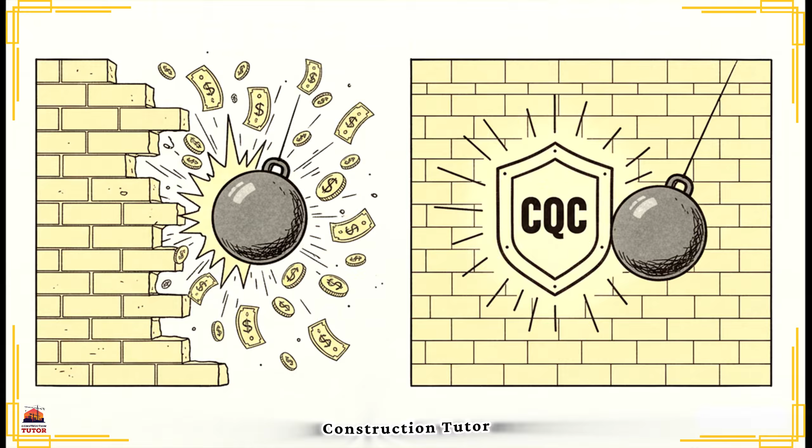Today, we're jumping into a really critical topic for any contractor out there, Contractor Quality Control, or CQC for short. So let me ask you, what's the one thing that can just absolutely wreck your budget, your schedule, your everything? It's rework, right? Having to rip out work that's already done because it wasn't right the first time. It is a massive and totally unnecessary drain. But what if there was a system specifically designed to stop that from happening in the first place? Well, that's exactly what CQC is all about.

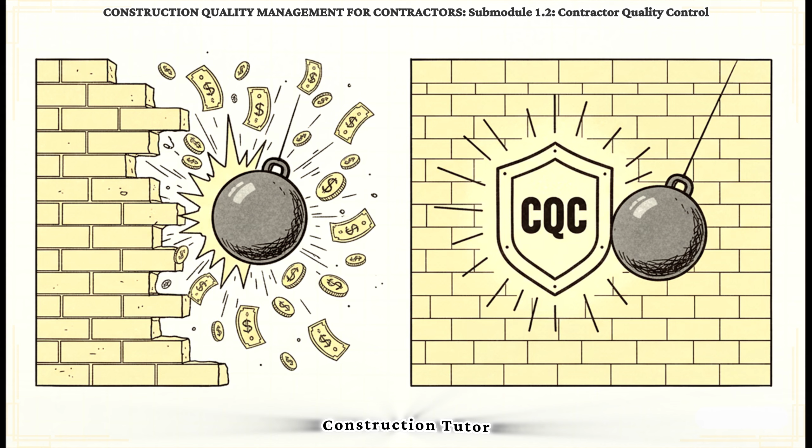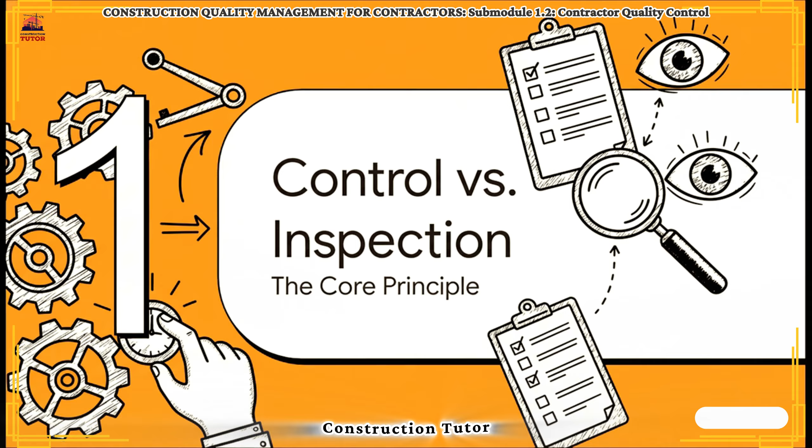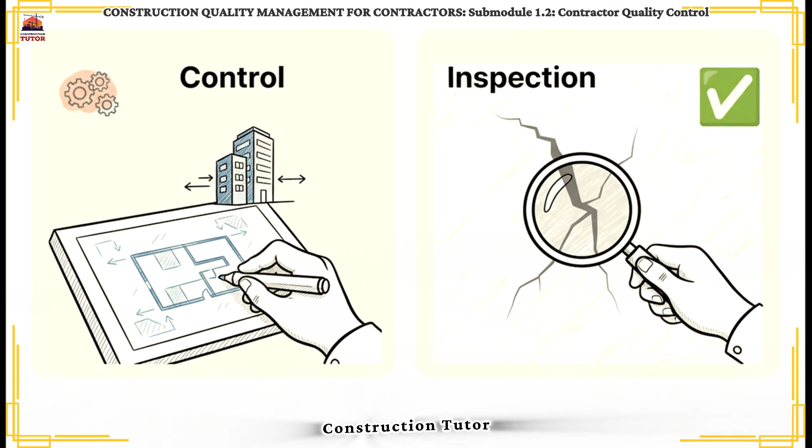Now, inspection, that's looking backwards. It's checking work that's already done or is in progress to see if it meets the spec. It's an after-the-fact process. If there is just one thing you take away from this whole explainer, let it be this. Control is preventive. Inspection is after the fact. A really solid CQC program is built entirely around that idea of prevention. It's a total mindset shift.

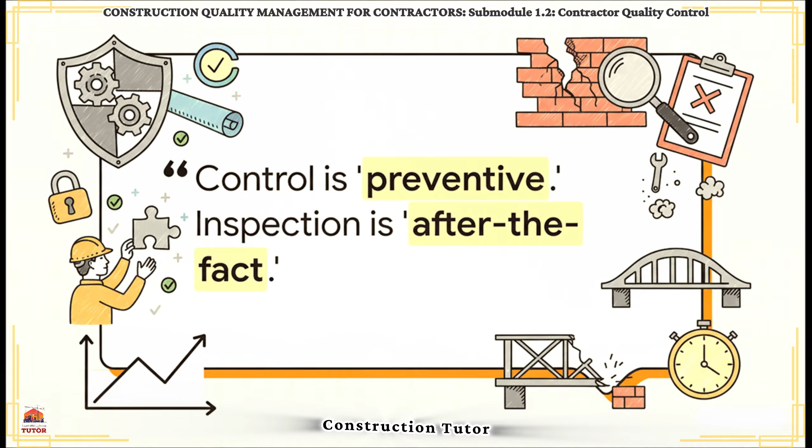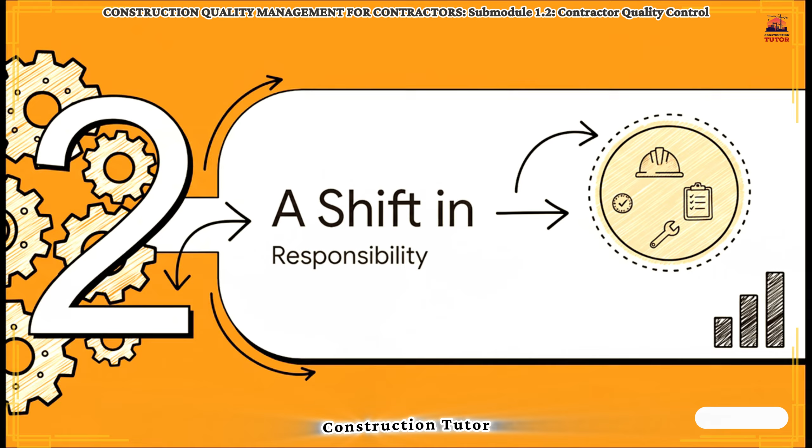Okay, so knowing that key difference, how has the construction industry actually put this into practice? Well, there's been a pretty huge shift over the years in who's actually responsible for quality. Back in the day, it was a completely different world. The owner, the government agency, they were the ones basically running the quality show. They were on site, telling the contractor what was good, what wasn't, what to fix. And honestly, it put a huge strain on the agency, and it really limited the contractor's own role. But yeah, those days are long gone.

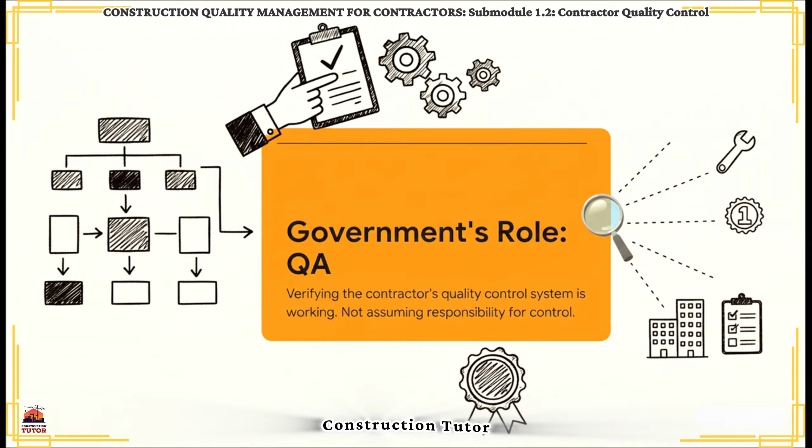Today, the responsibility for quality control is placed squarely, contractually, on your shoulders as the contractor. It's your job, written right into the contract, to have a system in place to control the quality of your own work. So you might be asking, where does that leave the government? Well, their role has changed too. They don't do quality control anymore, they do quality assurance, or QA. Think of them as the auditors. They're there to check that your CQC system is working the way it's supposed to. They're not there to manage your work for you. It's a really, really important distinction to understand.

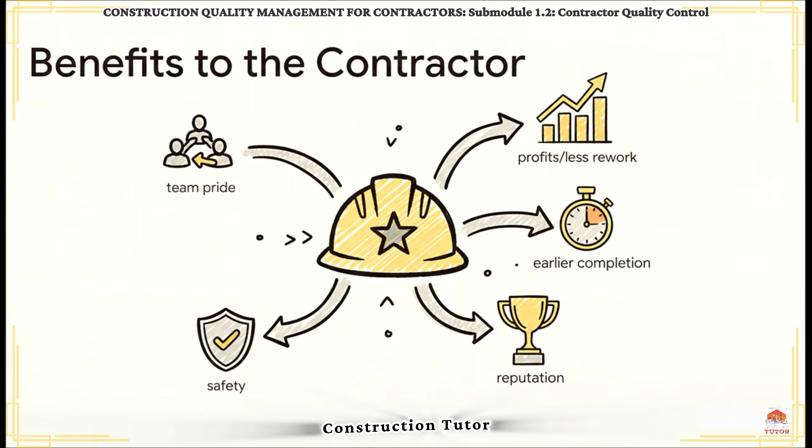Okay, I know what you might be thinking. Great, another responsibility on my plate. But here's the best part. When you do CQC right, it's not a burden at all. In fact, it's one of the single most powerful tools you have to make your business way more profitable and successful. And the benefits for you, the contractor, are just huge. I mean, the obvious one is less rework, right? That goes straight to your bottom line, more profit. But it's so much more than that. You finish projects faster, your reputation in the industry gets a major boost. You can even get better performance evaluations, which leads to more work. And let's not forget, it makes for a safer job site and gives your whole crew a real sense of pride in what they're building.

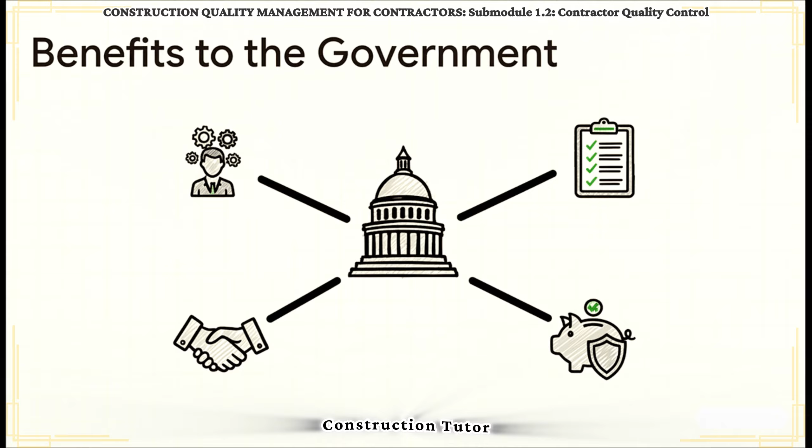And hey, it's not a one-way street. The government gets a ton of benefits too. They can use their own staff much more effectively. They're dealing with way fewer problems and headaches on site. And projects get done on time and on budget, which makes everybody look good. It is a genuine win-win. Because when you boil it all down, this is what everyone wants. It doesn't matter if you're the contractor, the agency, or the person who's eventually going to use the building. The ultimate goal is always the same: a quality product delivered safely, on time, and within the budget. And a solid CQC program is the key to making that happen.

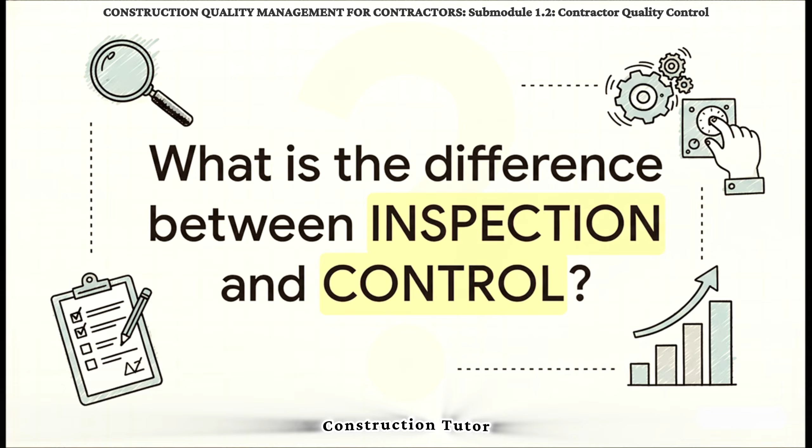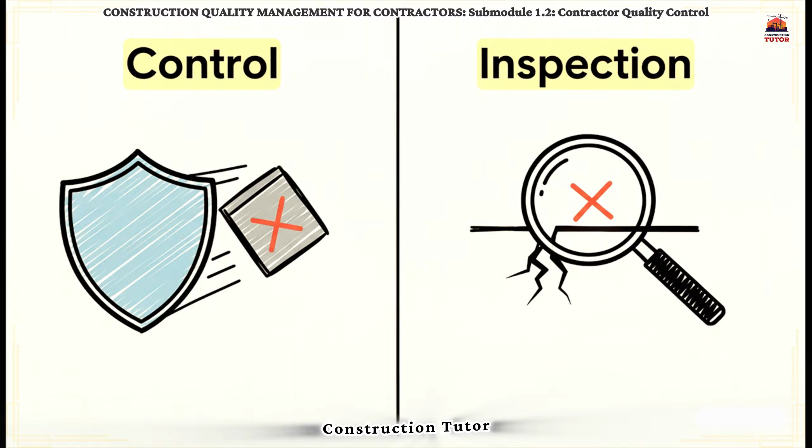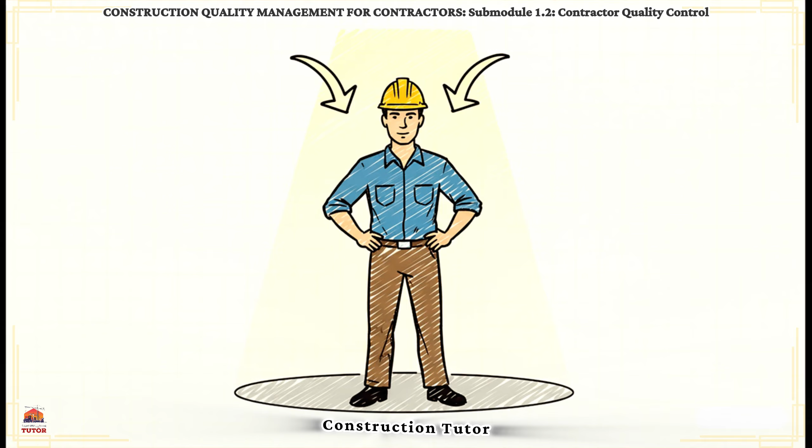All right, we've covered the theory. Now let's make sure these ideas are really locked in. We're going to do a quick knowledge check. Just a few questions to put what we've learned into practice. First one up, what is that core difference we talked about between inspection and control? Think about it for a second. And there it is. Control is all about proactive planning to prevent mistakes. Inspection is that reactive process of checking work to find mistakes. Okay, question number 2. In today's contracts, who is ultimately on the hook for quality control? You got it. The contractor. Plain and simple. It's your responsibility. Clear as day.

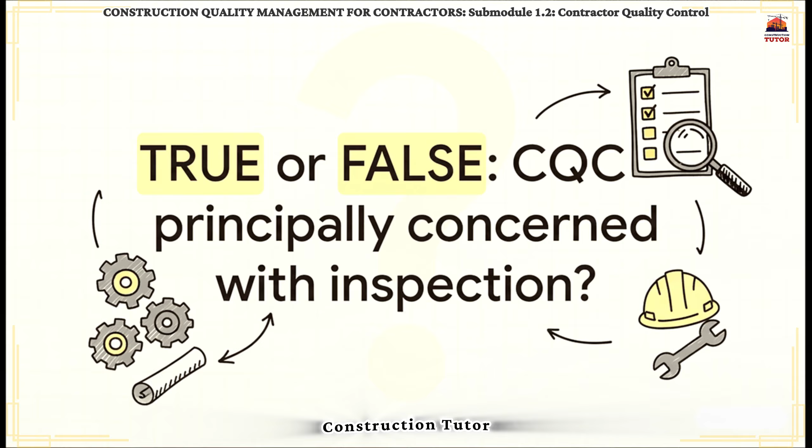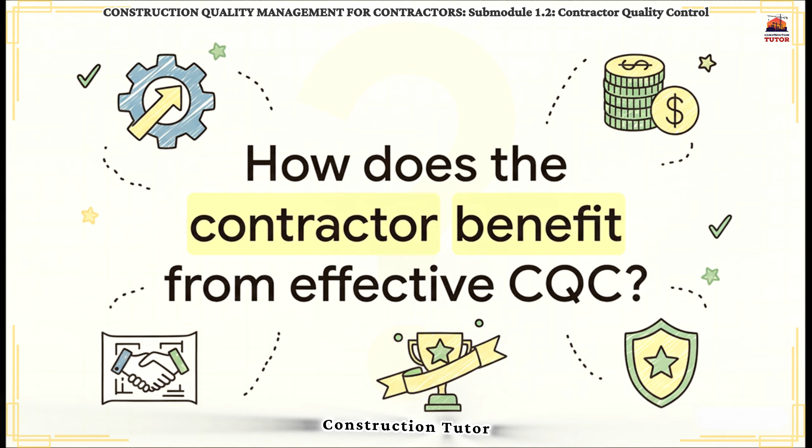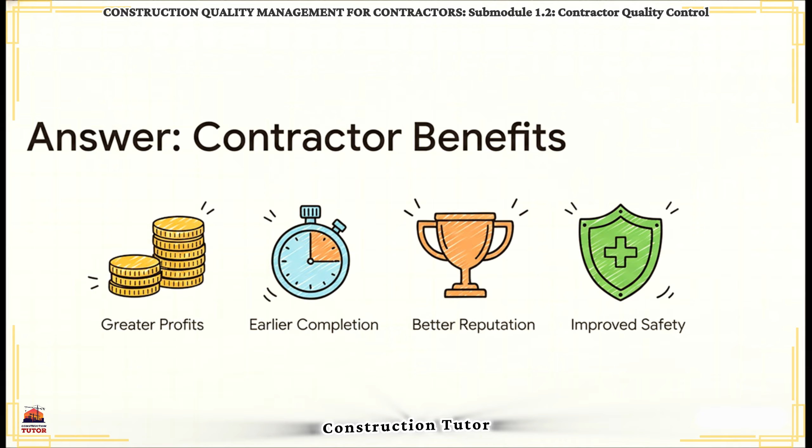All right, what about this one? True or false? CQC is principally concerned with inspection. That is a big, fat false. And this is probably the most common misconception out there. CQC is all about the control part. The whole point is to plan and prepare so well that when the inspection does happen, there's nothing wrong to find. All right, number 4. Let's bring it back to you. How do you, the contractor, benefit from doing all this? Well, the big ones are pretty awesome, right? We're talking greater profits because of less rework, finishing jobs earlier, building a stellar reputation, and running a safer site.

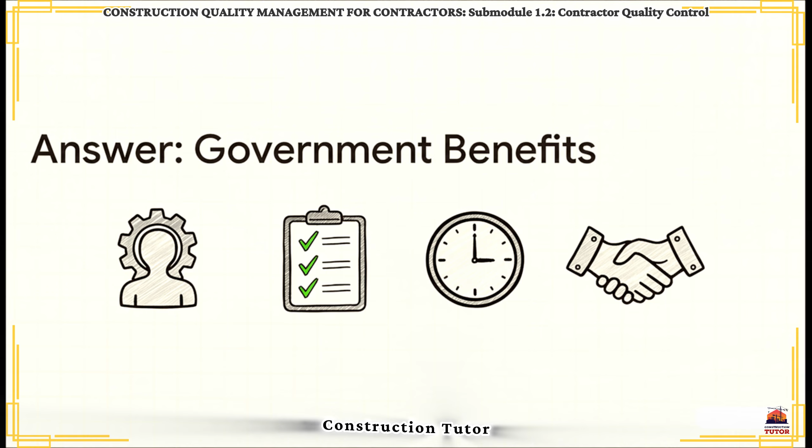And last question, why is this whole system a good deal for the government, too? For them, it means they can use their people more efficiently, they have fewer deficiencies to deal with, projects get done on time, and their clients are happier. It's a system where everyone really does come out ahead. Awesome job. Okay, let's wrap this up. If you forget everything else, I want you to walk away from this explainer remembering these key things. Here are the 3 big takeaways. Number 1, control prevents problems. Inspection finds them. Number 2, you, the contractor, are responsible for quality control. It's on you. And number 3, and maybe the most important, effective CQC isn't just a chore. It's a direct line to boosting your profit, your reputation, and your safety.

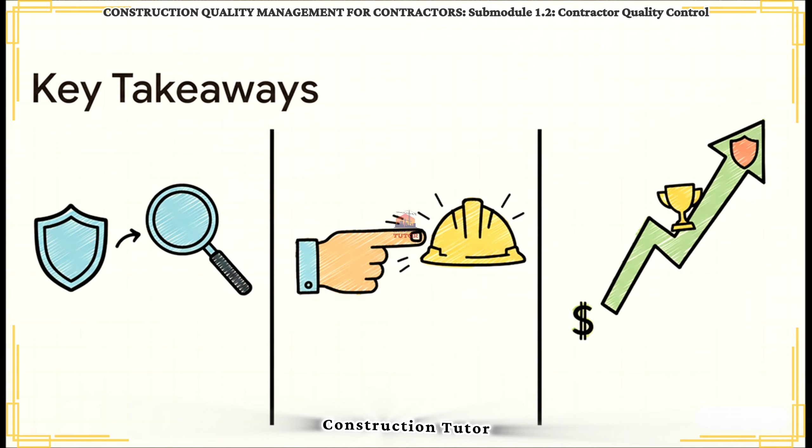So I'll leave you with this to think about. What's the very first step you can take to improve your quality control process? Not your inspection process, your control process. On the job tomorrow, what's one small thing you can plan ahead for to prevent a problem before it even has a chance to happen? I really hope this deep dive into contractor quality control was helpful.